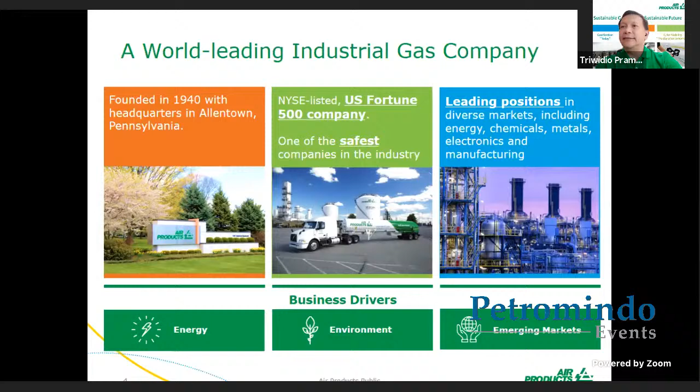So this is a little summary of the company by last fiscal year 2020: 8.9 billion in revenue, operating in 50 countries with 19,000 employees, serving more than 30 types of industry. We have market capitalization over 60 billion. We operate 750 plus production facilities, and we have 1,800 miles of industrial gas pipeline, which is a large amount of pipeline.

The accomplishment in sustainability, as Pak Rico mentioned earlier, hydrogen should play an instrumental contribution to sustainability development. This is part of the accomplishment of Air Products, which has become our business strategy and track record of execution to continue increasing our ambitious sustainability growth and goals.

So talking about 50% of the revenue from sustainable offerings, that's not small for the company. More than 1 million metric tons of CO2 equivalent avoided through efficiency improvement, not only in our own operations, but also working together with customers around the world on improving their processes and reducing emissions.

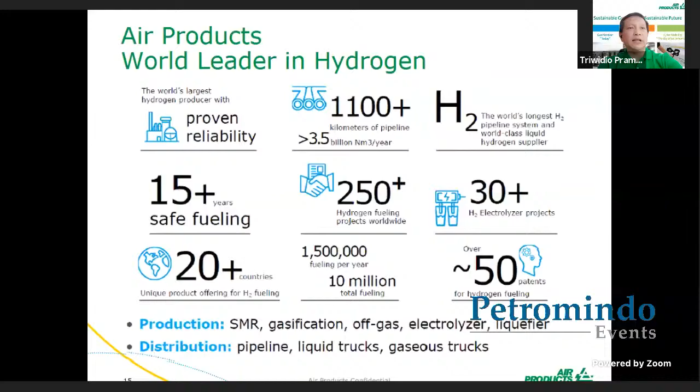Working in more than 20 countries, and production starting from SMR, gasification, off-gas, of course electrolyzers, and at some point we need to liquefy the gaseous to become liquid, which makes it easier and more economical to transport in large bulk volume. Distribution methods: we are using pipelines, liquid trucks, and gaseous trucks in tube banks.

We build, own, and operate the hydrogen plant since 1993, and now more than 250 hydrogen station projects in more than 20 countries. And this Kochi refinery hydrogen capacity in total is like 16 tons per hour of hydrogen. It's a huge capacity over there. And Air Products is a member of the Hydrogen Council.

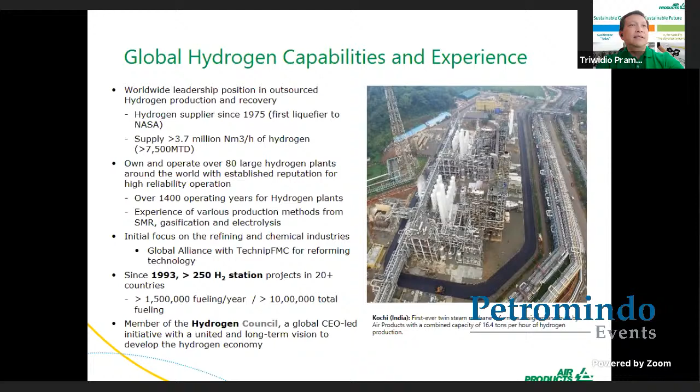Also used as a reducing atmosphere. Liquid hydrogen is used as rocket fuel, as you can see in the picture in this slide. So many varieties of application for hydrogen in industry.

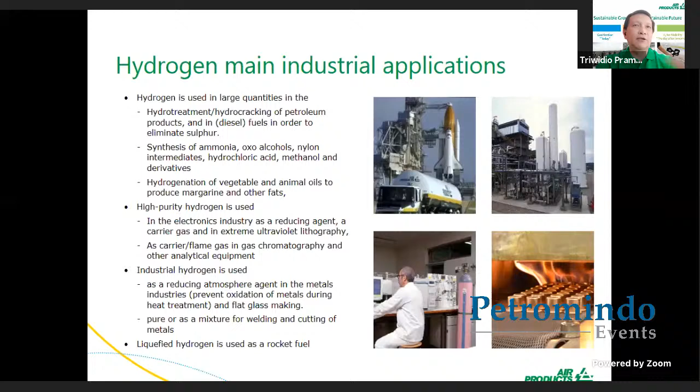So we are leading a global hydrogen provider. As a feedstock, it can come from fossil fuel or renewable energy, and production can use processes like gasification, SMR, or on-site generation. For renewable energy, one process is electrolyzer, where the power is supplied by solar, wind, or hydropower.

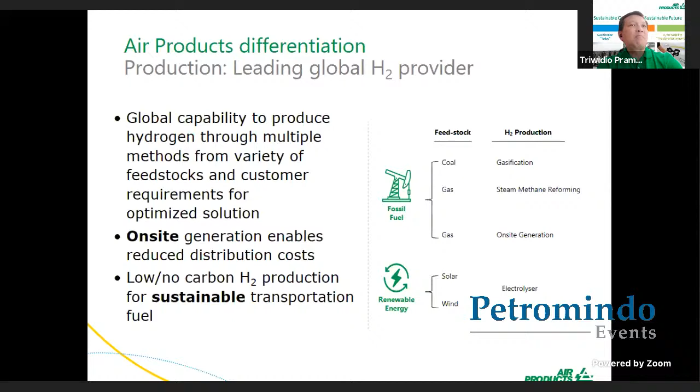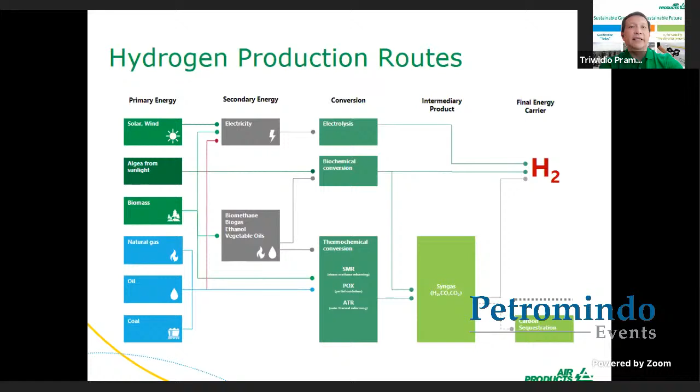The opportunity is the implementation of hydrogen as a future energy, which will lead to a significant contribution to the country's commitment in reducing carbon emission. This is a main theme right now, like net zero or reducing greenhouse gas emissions.

The challenge is that currently in the country we don't have a special policy related to hydrogen. We expect that the regulators and the government start looking at hydrogen as an alternative renewable energy, which is good to be developed in the country for different applications, from industry to transportation, and also generating power.

Same as the previous slide, I just want to mention that Indonesia has a target of reducing GHG emissions by 29% by 2030. This is what we call NDC, nationally determined contribution, and net zero by 2060.

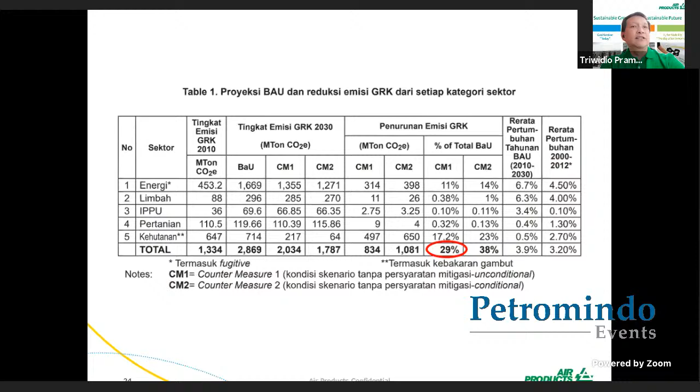So hydrogen can play a significant part here to achieve this policy, if the government puts in place regulation to support hydrogen use and development in the country. This table shows the 29% target as I mentioned earlier in the NDC.

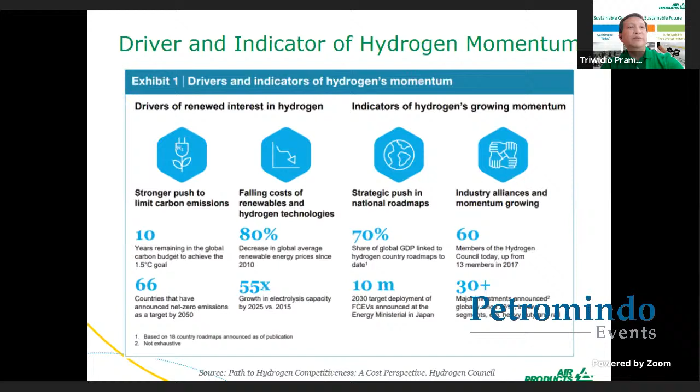This is a block diagram showing the NEOM project, the green carbon-free hydrogen. The power is supplied from wind and solar facilities, which then supply power to the electrolyzer to convert water into hydrogen, with nitrogen produced by ASU. It feeds the ammonia production to produce ammonia, which will carry the hydrogen energy for global distribution around the world.

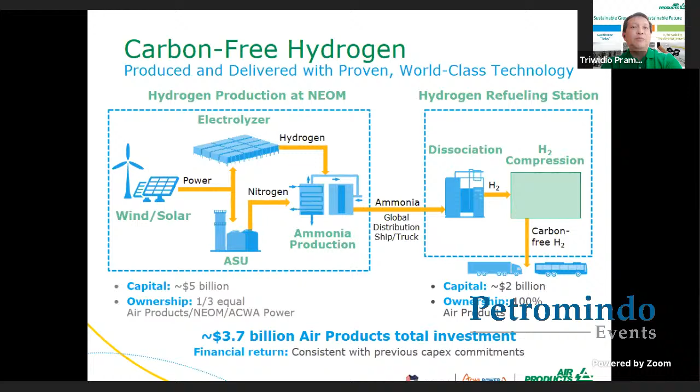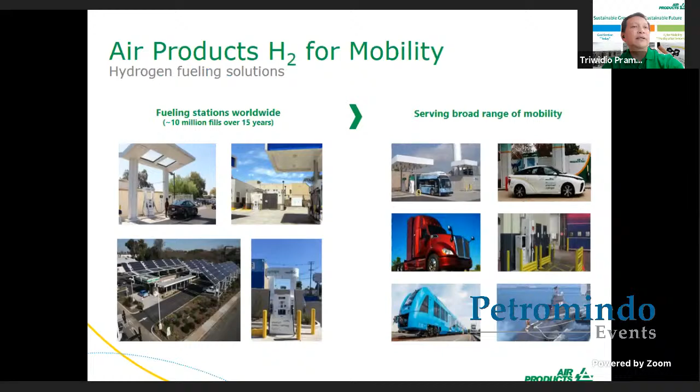This picture shows hydrogen for mobility by Air Products around the world - the refueling system, the type of transportation vehicles that now use hydrogen. This is also the SmartFuel hydrogen fueling technology we have. In these systems, we also use liquid hydrogen, as you can see at the lower right bottom corner, there is a tank.

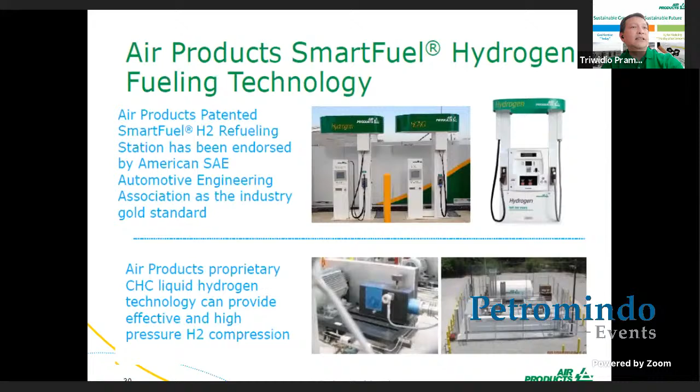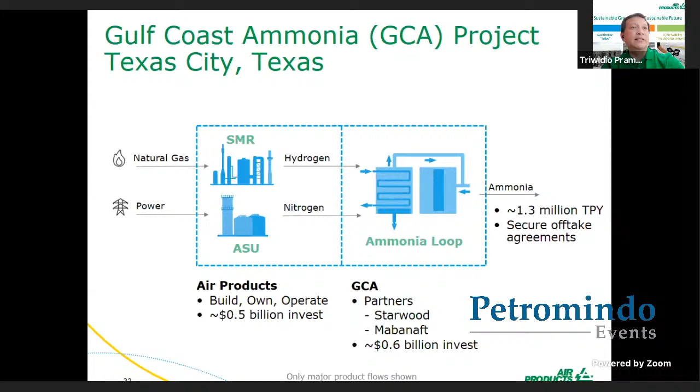There's another project in the Gulf Coast that we also doing the SMR and ASU to produce the ammonia. In this process, there are hydrogen and nitrogen production as well. But the feedstock here still uses NG, so the ammonia cannot be called the same as the NEOM project as a green ammonia.

This year we call it the gray ammonia. This is the last slide, I believe, sharing the latest project developed by AP with our partner in Western Canada, talking about net zero hydrogen.

So on the left-hand side, with the autothermal reformer, AP captures 95% of the CO2 for sequestration purpose. The amount of this can offset the CO2 emission produced by other hydrogen plants that supply the pipeline for this whole complex.

So we use hydrogen for the power plant, and the power will drive the compressor for the ASU, and also supply the power requirement for the ATR. Some of it is liquefied in the form of liquid hydrogen, and supplied in a 55 kilometer pipeline in that complex.

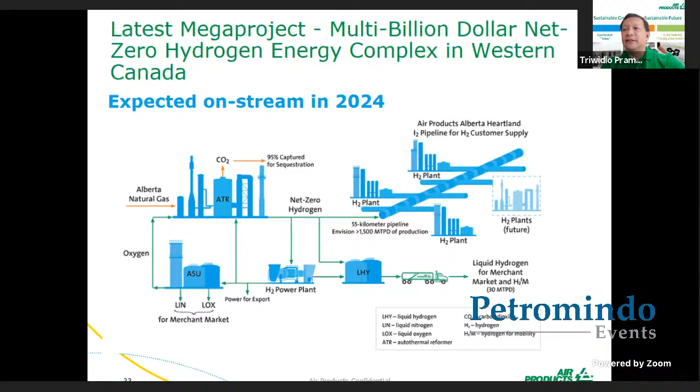So that's what we have so far in the works. As I mentioned, this is the last project that I want to share, and the last slide that I want to present in this webinar. So thank you, everyone.

Okay, thank you, Pak Tri, for your presentation. I think we can go straight forward to the questions, Pak, because there are so many. I don't know why it came so fast. The first question is from Pak Andre, Pak.

The question is, how does Air Products see hydrogen produced by electrolysis? Can it compete with hydrogen produced from SMR? And the second question is, will Air Products develop its own hydrogen stations if fuel cell cars become available in Indonesia? Please, Pak, go ahead.

Okay, thanks Pak Riko and Pak Andre Abioso, who raised this question regarding hydrogen. Yes, comparing the electrolysis process with SMR, at a certain dimension or capacity it depends on how much the feedstock for the SMR costs, and for the electrolyzer also how much the power cost will be. So the technologies are competing with each other, but the main cost contributing to the economics of each process is the feedstock for the SMR and the electricity cost for the electrolyzer.

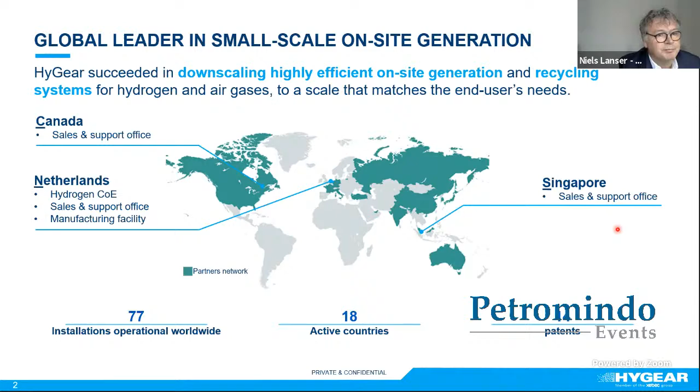Our gas generation technologies are very complementary across our group companies. In this presentation, I want to highlight the hydrogen generation technology, and in short mention the biogas upgrading technology and the nitrogen and oxygen generators. For on-site generation of hydrogen, we have at HyGear the HyGen SMR system and the HyGen E system. The HyGen SMR is a steam methane reforming system - we produce hydrogen by steam methane reforming of natural gas. The HyGen E is actually an alkaline electrolyzer system, where hydrogen is produced using electricity.

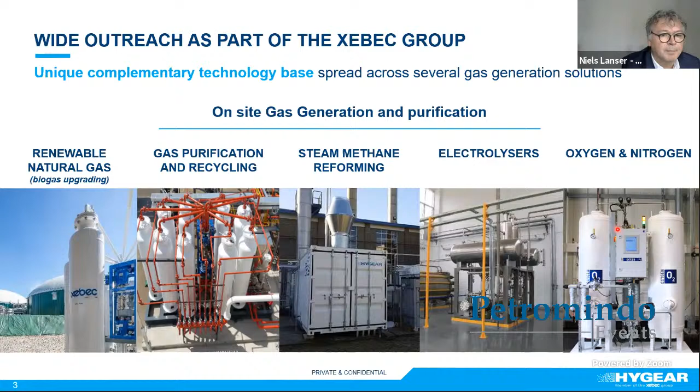So we have in total 4 groups of applications. The first one is biohydrogen - with this technology we produce renewable natural gas from biomass and use this gas to produce green hydrogen with our SMR technology. The second application is hydrogen energy, where we use our technology to develop hydrogen filling and fueling stations for cars and buses based on fuel cell technology. The third application is industrial gases - hydrogen, nitrogen, and oxygen that we generate on site at the customer.

Regarding this group, the most important markets we are active in are the float glass industry for creating the protective atmosphere in the tin bath for the production of glass, the metal sintering and annealing industry, the food industry for the hydrogenation of oil and fats, and the electronics and semiconductors industry. The fourth application is medical oxygen, where we supply small oxygen generators for medical purposes.

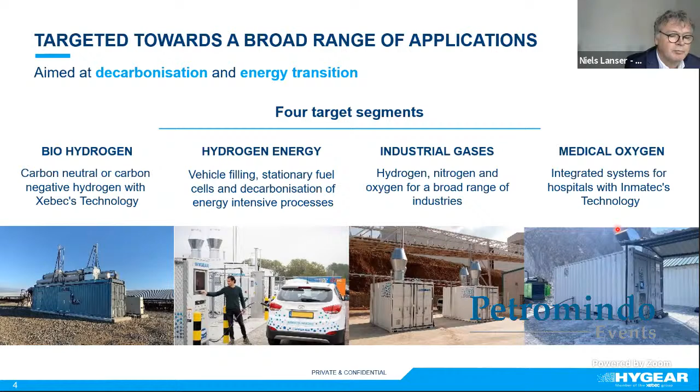So our business works as follows. What we do is offer turnkey sales - this means the customer can buy the system, and in this case we can do the installation and commissioning, and next to that we can also offer a service and maintenance contract. The second important part of our business is the gas as a service construction.

In this construction, HyGear will do the investment and the customer will pay for the gas produced from the system. The customer can pay a variable fee, which is dependent on the amount of hydrogen produced, and a monthly fixed fee, for example. Only a fixed fee or only a variable fee is also possible, and everything in between. So we are really flexible in the contracting. Important in these types of contracts is that we guarantee 100% reliability of supply, but I will later explain how we do that.

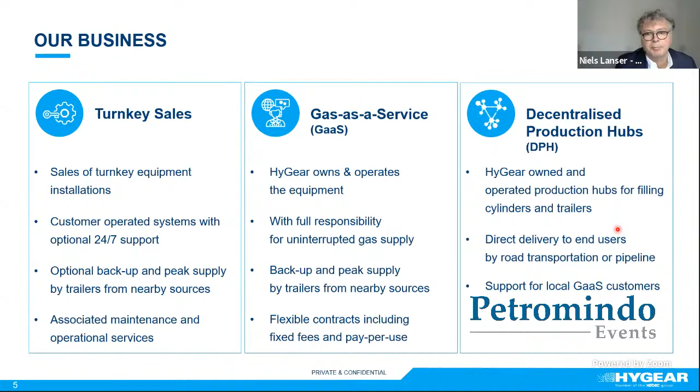An important part of our business and also our corporate strategy is the development of decentralized production hubs - we call them DPHs. What we want to do is create a network of small hydrogen production plants on different locations close to the customer. From these locations, we can either truck in the hydrogen over a short distance or supply the hydrogen via a pipeline. We are planning to develop these decentralized production hubs in Europe, Asia, and North America.

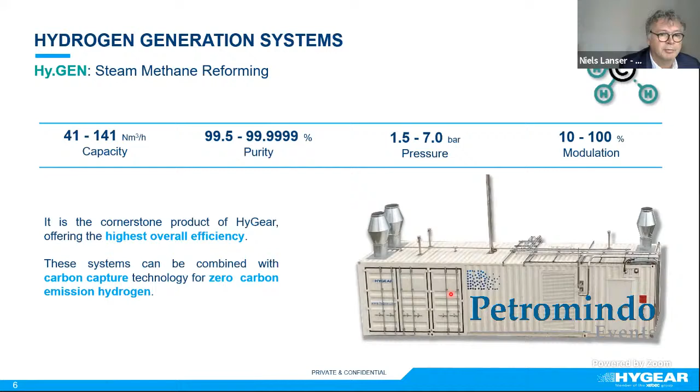So what we have - the hydrogen generation systems are built inside a container. This is an example of the steam methane reforming system. They have a capacity between 41 and 141 normal cubic meters per hour, and a purity range between 2.5 and 6.0, so you can also use them for fuel cell applications. Outlet pressure is between 1.5 and 7 bar, and there is a modulation rate between 10 and 100%. As you can see, the systems are built inside a container, built in the Netherlands. They can easily be transported to the end customer, and we can install them over there.

So to give you an idea of the process, very basic, we'll go through this. With steam methane reforming, we have natural gas going into a desulfurization system, so we take out the sulfur. Then this gas goes into a steam boiler, where the gas is mixed with steam. Then this mixture goes into the reformer and is heated up to a temperature between 650 and 700 degrees centigrade.

Then hydrogen is produced, and the reformate goes to a water gas shift reactor - that's a system where we produce even more hydrogen by adding water. It is an efficiency step in the whole process. This reformate goes to the pressure swing adsorber, the PSA, and the hydrogen is separated from the other gaseous components and is stored in a hydrogen buffer. It's actually a small buffer only used for pressure control inside the system, but also to deal with small fluctuations at the output of the system.

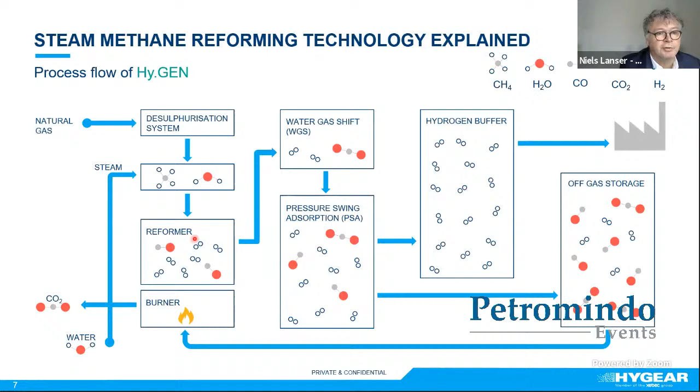And the off gas is stored in off gas storage, and this off gas is used to feed the burner. The heat of the burner is used to make the steam. So what you see is we try to make use of all waste streams as good as possible, and only natural gas is used to produce the hydrogen - that's the reason why it is a highly efficient system.

So we have three different models: the 50, the 100, and the 150. The purities are between 2.5 and 6.0. They need natural gas as an input, electricity, water - that can be normal tap water - and compressed air for the control of the valves. Also interesting to mention is that they are built inside a container - the smallest one is built inside a 20 feet container, and the Hy.GEN 100 and 150 are built inside a 40 feet container.

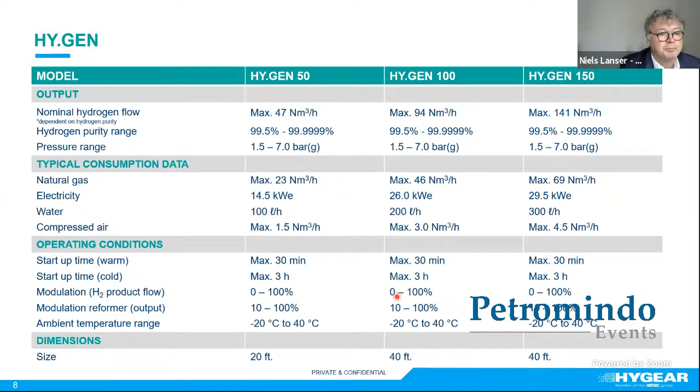Okay, then we have also one of our technologies, the electrolyzers. We have small scale electrolyzer systems in a capacity between 10 and 250 normal cubic meters per hour, and the purity rate between 3.0 and 5.0. The output pressure is between 3 and 30 bar, and the modulation between 20 and 100%.

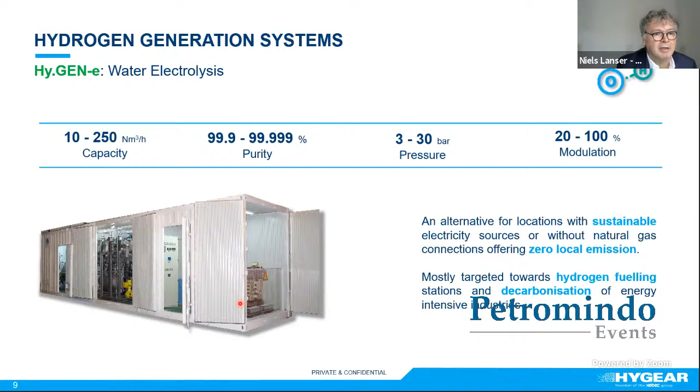This is an alternative for locations with sustainable electricity sources, so if no natural gas is available, you can also use the electrolyzer system to produce the hydrogen. These systems are also built inside the container, except for the two largest ones, which are skid mounted. So this is a basic scheme of the process.

It is based on alkaline technology. So what we use is normal tap water. We have inside the container a water treatment system where we produce the demineralized water. The water is mixed with lye, which is actually the catalyst for the process. So this mixture goes into the electrolyzer.

The hydrogen is produced, the oxygen is produced by the use of electricity. Then the lye is separated from the hydrogen and is sent back to the lye preparation section. That's the same for the oxygen separation. So you don't use up the lye in this system.

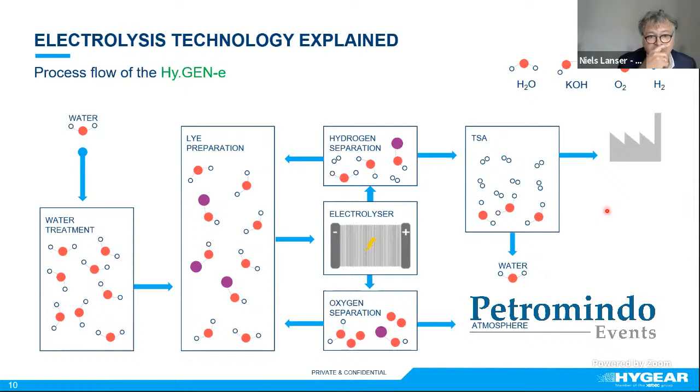Then this gas stream goes to the TSA, where we take out the water, and then we have the pure hydrogen that can be used by the customer. So that's basically the process.

The systems that we have are in the range between the Hy.GEN-e 10, producing 10 normal cubic meters per hour, up to the 250, producing 250 normal cubic meters per hour. It's important to understand that if you need higher flows of hydrogen, you can place more systems in parallel. That's also what we prefer to do with customers, because then you create redundancy.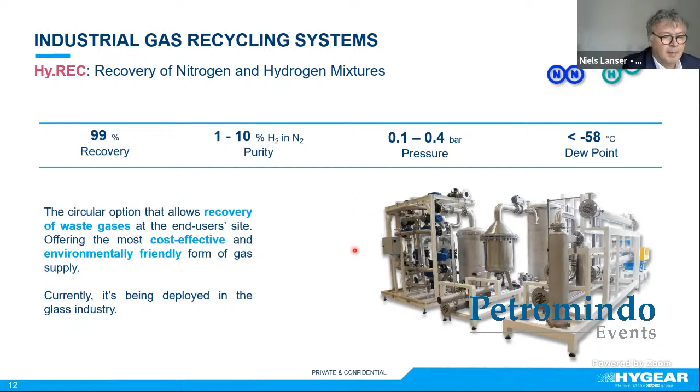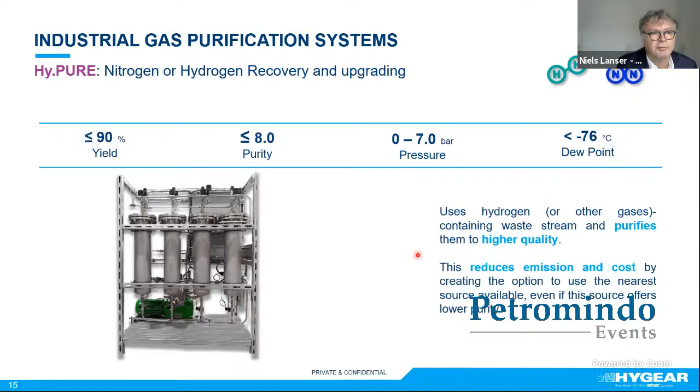This is the Hy.PURE, a system where we purify contaminated streams of gases where we also have hydrogen. So we can make pure hydrogen from these gas streams.

And also very interesting is the BioStream system. It's a biogas upgrading system where we can use landfill gas and biomass to upgrade these gases to natural gas quality. The interesting thing is that we can use these gases also in our SMR technology.

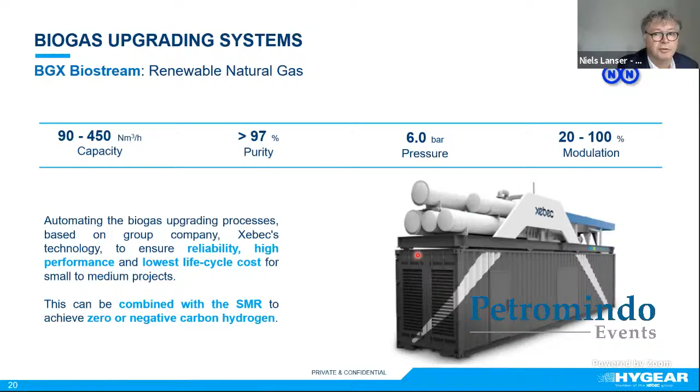So in this way, you can also produce green hydrogen with SMR technology. So to summarize, why on site? There are huge cost savings, reduced emissions because you don't have the trucking, and it's a highly efficient system.

Increased safety - the reason for that is because producing on site means you don't need large storage capacity of hydrogen, and it is a completely automated system, so there's no human interaction, which also introduces a risk. So that's what you don't have. It's a very reliable supply - I will come back to that later to give you an example. It is a high energy efficient system.

It's a very compact, modular system, so you can place more systems in parallel. It's autonomous with remote monitoring - there's always an internet connection with our service team, so we can always monitor and operate the system from a distance. And independency is also important, that we are not dependent on a third-party supply.

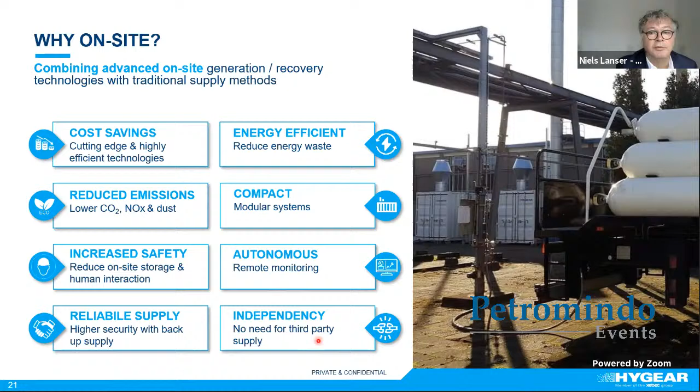Regarding cost reduction, what we see is, for example, if you have consumers with low consumption, let's say 20 normal cubic meters per hour, then it's more cost effective to truck in the hydrogen. But once you go higher than 20 normal cubic meters per hour, it is more cost effective to use a hydrogen system. You see a dramatic decrease in costs if you use on-site generation, and if the utilization is higher, the cost per cubic meter hydrogen is lower.

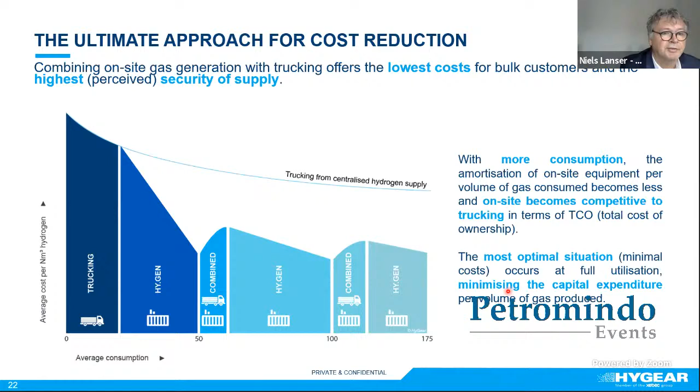If you go a little bit higher, you can combine a tube trailer with the hydrogen system, and at a certain moment you can introduce a second hydrogen system, which will lead again to a cost reduction. In this way, you can go up to around 175 normal cubic meters per hour, and you will always be under the price of trucked-in hydrogen.

Reliability of supply is very important, because if we cannot supply 100% reliability of supply, we don't have a business. We have a 3-layered approach for that: redundancy, on-site backup, and trailer backup.

This is an example of a typical site. We have 2 generators on site, which creates redundancy. That means if one generator fails, we can always use the other generator to supply the hydrogen. The generator is also used to fill the storage with a compressor, a hydrogen compressor, so during maintenance, for example, we can use the hydrogen from the on-site storage. The 3rd layer is trailer backup: we have our own tube trailer fleet, which we can use to supply backup if necessary.

We have many sources in Europe and Asia where we can fill our tube trailers, and we can always supply the hydrogen via a tube trailer if this is necessary.

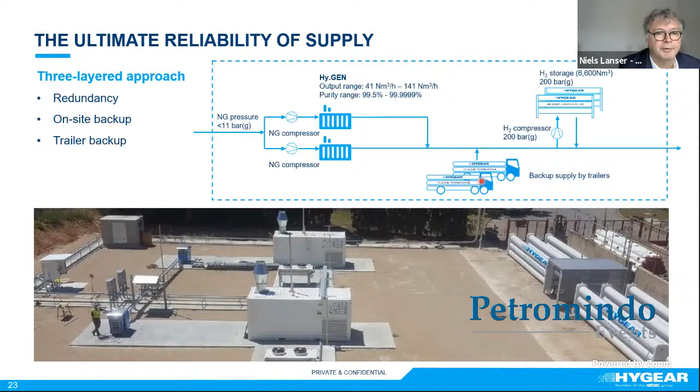The safety aspect is also important, especially when you talk about hydrogen filling stations in areas where people live. What you see here is an example of a filling and fueling station in the Netherlands, where we did a quantitative risk assessment.

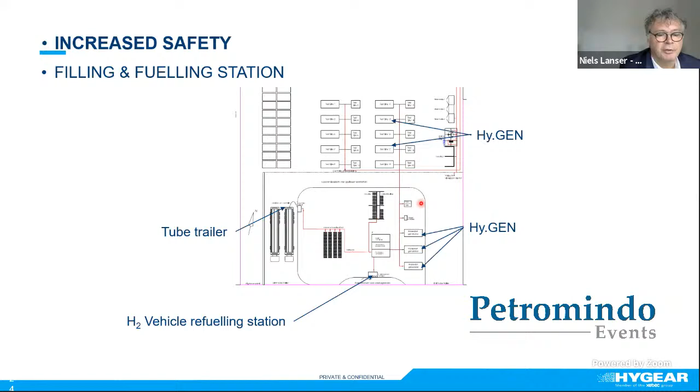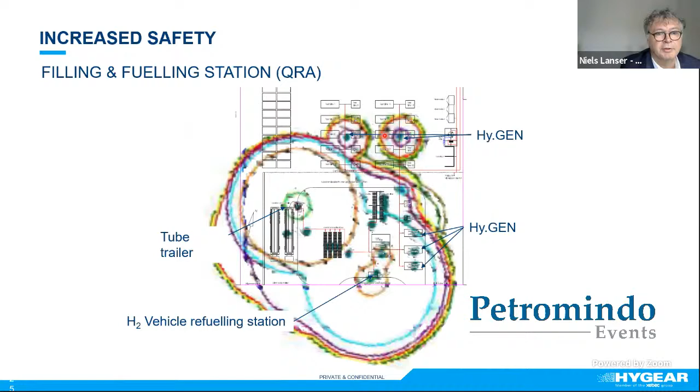The reason for that is there's a large storage capacity in the tube trailer. That's one. The second point is that there's always human interaction, because you have to connect and disconnect the hoses, for example, and that introduces a risk. That's not the case with the Hy.GEN system, because there's no human interaction, it's fully automated, and there's not much storage inside the system itself. So in urban locations where people live, it is advisable to use a Hy.GEN system for hydrogen generation for a fueling station, for example.

A unique customer-centered approach: HyGear is really strong in customer engagement, technologies, and support. We establish strong partnerships with our customers, and we are flexible in the contracting. Regarding the technologies, we can offer the complete product range of gases needed for most production processes by using on-site generation technologies.

Our technologies are really complementary, so we can always offer you the best solution, and our technology is proven in a wide range of industries and very reliable. On top of that, the technology is cost efficient and environmentally friendly, and we have a 24/7 service team available at different locations around the world, so we can always serve you in the best way. All our systems have an internet connection with the service team, and they're immediately notified when something goes wrong.

In 95% of the cases, the service engineer can fix the problem from behind his laptop. And if this is not possible, he will visit the customer to solve the problem.

Some possible configurations: this is a typical configuration of a production site at the customer. We have 2 Hy.GEN systems in combination with a storage and a hydrogen compressor, which is used to fill the storage from the hydrogen produced by the generators. This is a typical site, and you see the footprint for this site is around 20 meters by 35 meters, so it is a relatively small footprint.

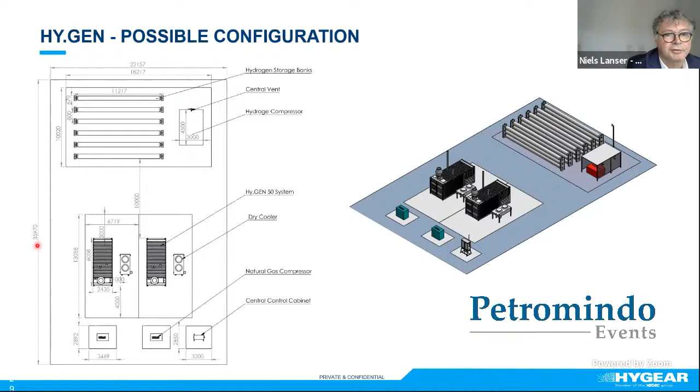Some examples: here we have the filling site in the Netherlands, which is what I showed you earlier for the quantitative risk assessment. Here we have the tube trailers, here the bottle racks and storage tubes, and here the hydrogen systems producing the hydrogen along with the compressor system. So this is a typical site for filling tube trailers and bottle racks.

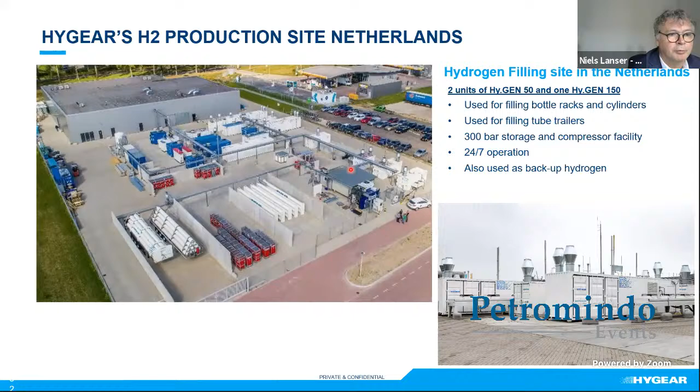This is a site in Turkey, the hydrocracking plant, where we use the hydrogen for the lubrication of oils. What we have here is quite a large site. We have 2 Hy.GEN 150 systems in combination with a large storage and the hydrogen compressor to increase the pressure to 30 bar for their process.

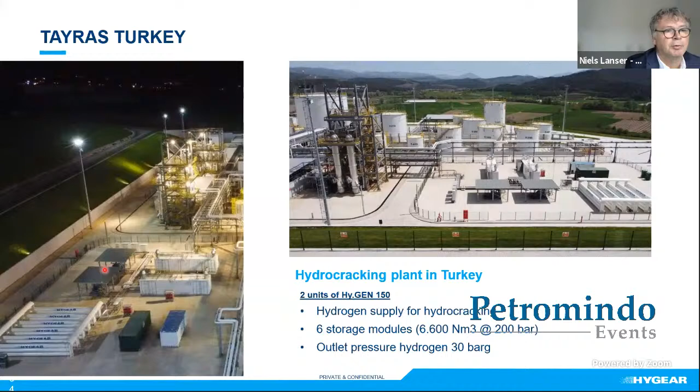This is Philips in Turnhout, Belgium. You see they are placed very close to each other, so that's also possible. Here we use them also in combination with tube trailers, because they need a bit more than the system can supply, so we use our tube trailers to supply the extra amount of hydrogen.

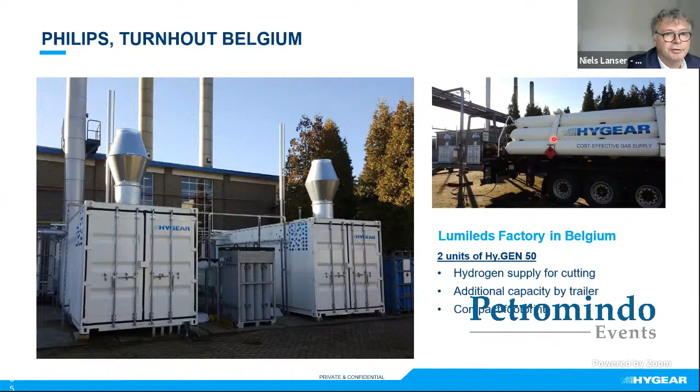This is the site. It's a glass factory in Spain, where we also have 2 systems in parallel in combination with storage. This one is in Russia, where they have 4 systems in parallel. They actually use 3 systems for the process, and they have the 4th one in spare, so if one system has maintenance, they can use this system to produce the required amount of hydrogen.

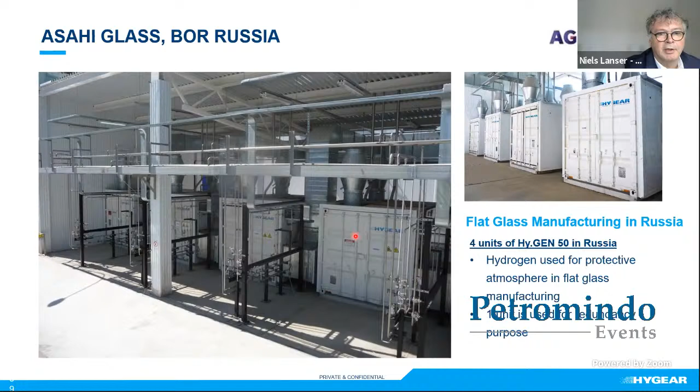This one is in North America, Plug Power. For Walmart, we supply the hydrogen for the forklift trucks. It is a warehouse, so they have a lot of forklift trucks, and what we did actually is that normally they use batteries for that, but they took out the batteries and replaced them with fuel cells. The fuel cells need hydrogen, so we produce the hydrogen and we supply it to this customer.

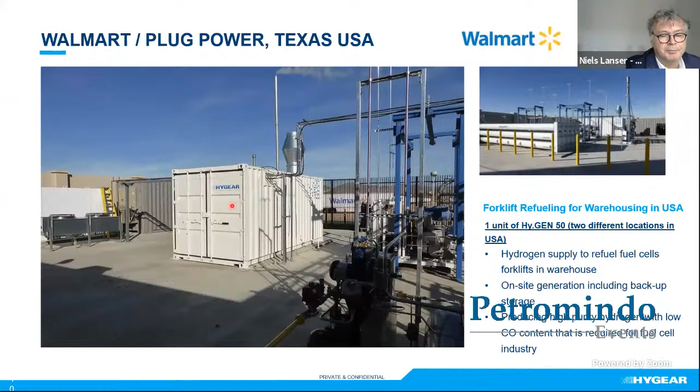And then the last one is that we also built, as an example, a refueling station in the Netherlands, where we use our technology to fill buses and cars with hydrogen for transport purposes. So this is in very short what I wanted to show you, what we do and the role that we play in the development of the hydrogen economy.

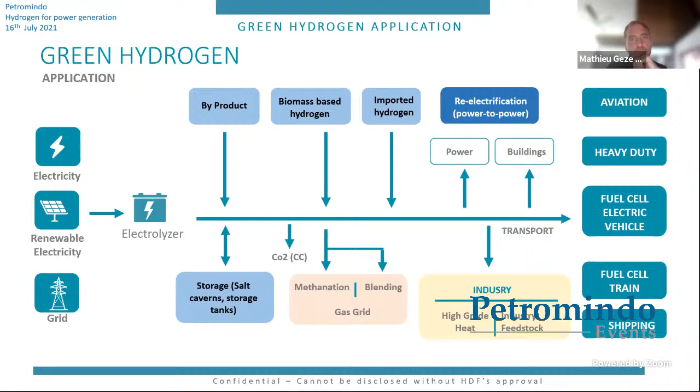In the meantime, we can see that worldwide there is a momentum for hydrogen. Many countries have developed a kind of national plan to make green hydrogen projects happen. That is wonderful because it means that the cost will go down. It's not a question mark, it's certain, it's just a question of time. When we see the numerous pilot projects in Japan, Australia, Europe, and the US, there is no doubt that the suppliers will increase their capability and will diminish the cost. And that is key for developers like HDF.

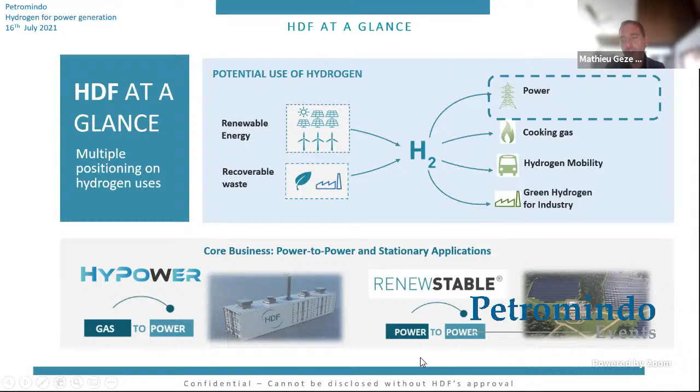As I said, we are focusing on power sector, and we are addressing it with two types of projects. One is called Renewstable Power Plant, from renewable energies for firm stable power. The second type of project we propose is HyPower, from hydrogen we deliver electricity thanks to a fuel cell. I will focus mainly on the Renewstable Power Plant because this is the type of project we develop in the region. And I will finish by how we can work on sector coupling, how power sector and maritime sector could have synergies.

A few words on the renewable energies context globally, and then more especially in Indonesia. Renewable energies is super cheap now. There is a great return on experience. It's easy to develop projects and to implement them. The difficulty is that it's intermittent power and non-dispatchable, so especially on small grids, it can be difficult to develop renewable energies.

As an average, most grids can develop easily up to 20%. Above 20% is thought to have strong impact on grid management issues, and the larger the penetration is, the stronger the difficulties will be for the utility. In Europe, for instance, the difficulties are less obvious because the grids are interconnected.

So when Germany is developing 30% of renewable energies on their grid, they are interconnected with many other countries like France, Belgium, and many others. So when they have excess of wind, they can sell it. And despite that, several times during the year, they have negative price in Germany. While when you are an Indonesian island, it's more difficult and even impossible to sell that excess of renewable energies. So that is the context.

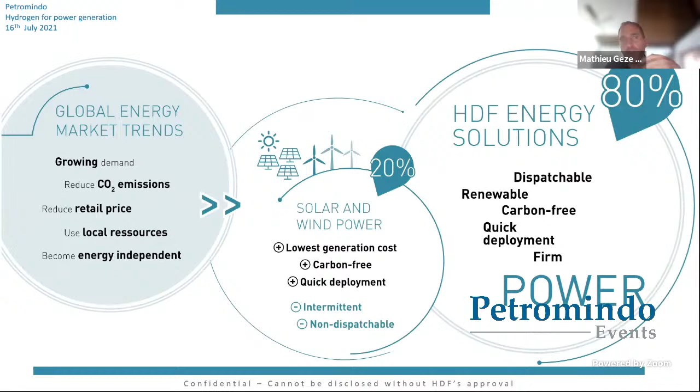With the Renewstable power plant, we can help to integrate up to 80% of renewable power without disturbing the grid stability. In Indonesia, I will make the context simple, and I do believe the context explains the difficulties PLN is facing for developing renewable energies. On one hand, you have the large grids, Sumatra, Java, Bali, Kalimantan, Sulawesi, where you can have affordable coal and gas.

Nowadays, you may face overcapacity because also of the COVID context. But for a country like Indonesia, when you benefit from such amount of coal and gas resources, it could be the cheapest way to produce electricity on the very large grids.

In the meantime, you have East Indonesia, where the grids are much smaller and where it can be difficult, even impossible sometimes, to bring coal and gas locally, because you have to set up an ad hoc infrastructure for the LNG, and that is not economically feasible when the grid is too small. That's why in East Indonesia, but not only, worldwide, in grid island context, it's very expensive to produce electricity because you cannot use cheap power.

In the meantime, when you want to develop solar and wind farm in Indonesia in the west, we need to fight against coal and gas. Sometimes it can be difficult, depending on the context. And in the east, there is the technical challenge of intermittency. For PLN, and this is the same in other countries in similar context, it will be difficult above a certain level of integration to handle the intermittency. And I do believe this context explains why the country has been struggling with renewable energies.

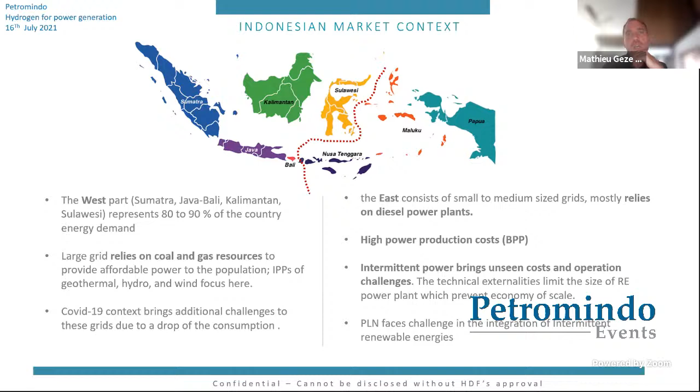Hopefully, the cost of solar and wind is getting lower, so step by step it should be able to fight against coal and gas. And in the East, we believe that the Renewstable power plant could be one of the answers to address the intermittency factor. What is a Renewstable power plant?

This is a plant where we combine PV or wind or both with batteries and hydrogen. The hydrogen is produced on site, so we tackle the logistic challenges that LNG or coal face to deliver power in remote areas. We produce the hydrogen on site with an electrolyzer, store it in tanks, and it becomes electricity at night with a fuel cell. So the whole plant is 100% logistic free.

In the meantime, it can deliver firm and stable power at a high capacity factor, minimum 80%. It can include many grid services to be sure PLN won't have grid stability issues in the areas where we develop our projects, and the sizing is very flexible. The unique constraint is to deliver 1 megawatt capacity at night, and then it's just a question of reciprocal commitment in the PPA. So at the end of the day, these power plants are very similar to a thermal power plant, because the capacity factor is high and we deliver commitment on the stability of the system.

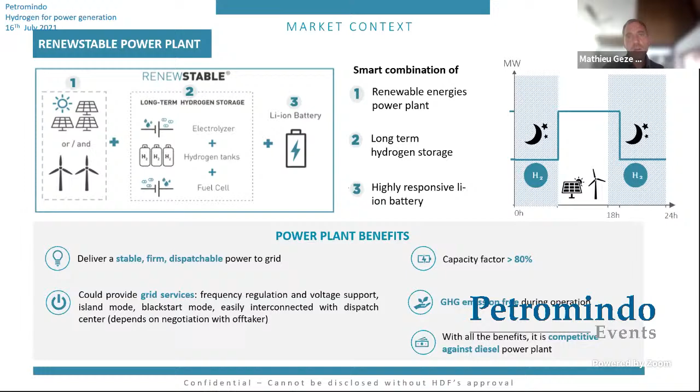So the benefits, I will focus on two, and it's very obvious. On one hand, we reduce the local cost of electricity. We address remote areas, and in remote areas most electricity is produced from diesel genset, which is quite expensive. So we reduce the dependence on diesel gensets, and hence reduce the average cost of electricity generation. In the meantime, we enhance the grid stability. It's important to address both topics at once, because you can be very cheap, but if your system is unstable and brings troubles to PLN, it doesn't matter whether you're cheap or not. It's not interesting for the system, and vice versa. So on our side, we address both items at the same time.

I will give you an example of a project we are developing in France, in a remote area called French Guiana. This is surrounded by Amazonia forest and the sea, so like PLN in East Indonesia, but the utility there is called EDF. They struggle with intermittency, they struggle to diversify the local mix. The cost of electricity generation there is quite high, while the capacity installed is 300 megawatts. So our power plants are a way to help diminish the dependence on diesel gensets.

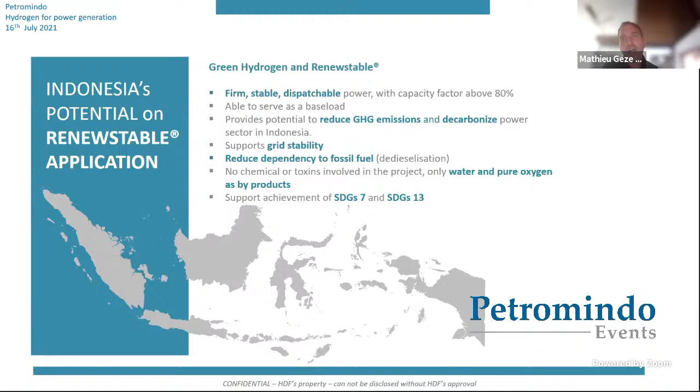I will explain now quickly the other type of projects we do and might do in Indonesia. There are the HyPower projects, from hydrogen we will produce electricity, whether the hydrogen is green or blue. This is a way in Europe, for example, to replace gas peaker plants. If we want a grid to become 100% CO2 free, we need to replace gas, and the HyPower plants can play that role. It can also be a way to address shore power and industrial needs.

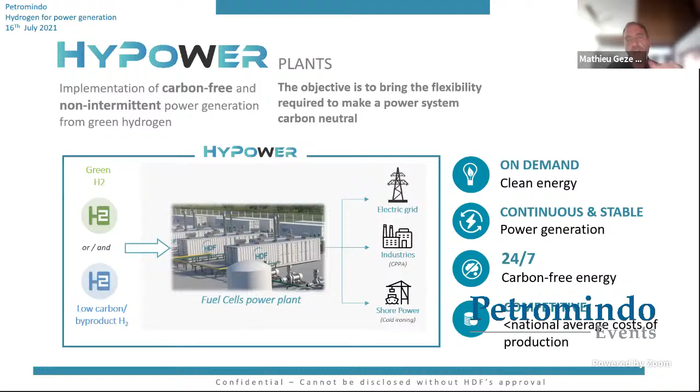As an example, we have a reference in the petrochemical plant in Martinique Island, a French island in the Caribbean, where we use excess hydrogen from the refinery to convert that into electricity. Such an application can be used for captive power, or we can sell the electricity to the grid, depending on the context. And that is economically viable. We can produce electricity below the national average cost in Indonesia.

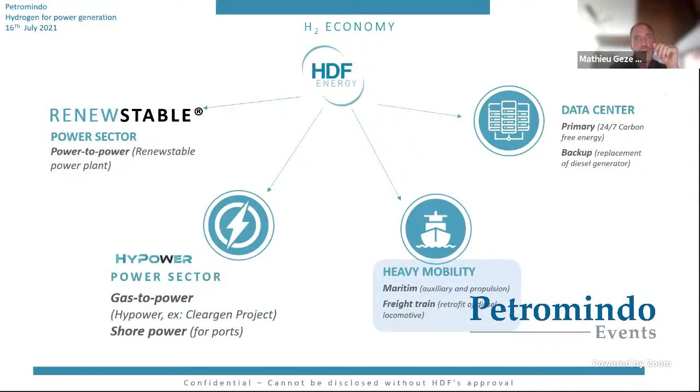Lastly, I would like to talk about sector coupling, especially for Indonesia. It could be an interesting approach, and also for the Philippines. So we explained how a renewable power plant can accompany the diversification of a remote grid. But in the meantime, those areas are highly dependent on the maritime sector, for tourism, for commercial needs, for industrial application. The maritime sector is very key in those areas.

If we want to decarbonize the maritime sector, the only way would be to use hydrogen as a backup for power, to decarbonize ferries, or for local mobility. Due to the versatility of hydrogen, it will be a great and unique way to decarbonize those sectors.

There are real synergies between the renewable power plant and the maritime sector. Developing a renewable power plant in remote areas means that green hydrogen can be available locally. Developing both at the same time would help diminish the incompressible costs for the maritime sector - the cost of development, infrastructure, and O&M. When merged with larger commercial scale projects, it will bring down many costs, and can help make maritime applications quite sustainable and affordable.